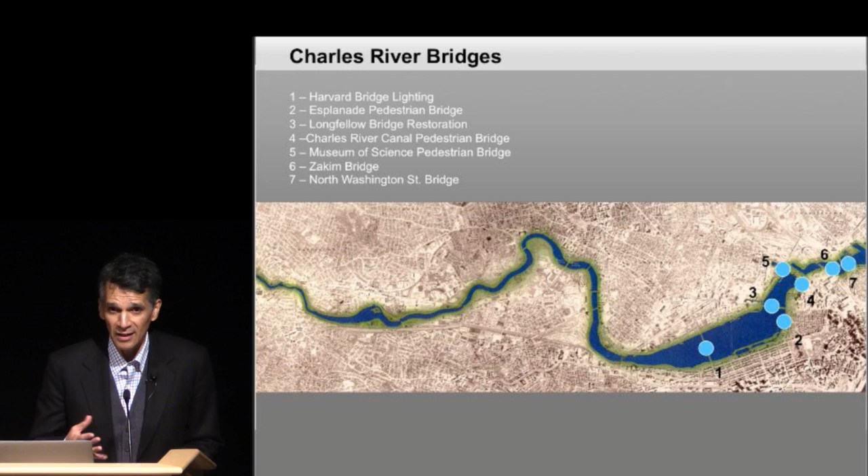But luckily, we were able to win a competition to do a lighting for the structure, and this is all private funding. It's a donor that's going to stay anonymous, and they're going to provide, I would say, about $3 million to do a new lighting for the project.

The Harvard Bridge is very low-key, but one of the things that is important about the bridge is the granite piers. These are historic—this is the oldest bridge actually in the Charles River, one of the oldest. We decided to highlight the structure from underneath. That was one of the things that we wanted to do. We added these little blue lights, which will be part of the structure supporting the bridge itself. We always feel like it's important to highlight different structural elements of a bridge when you light it, and this is one of the ways that we thought we could do it.

This is another view from the side. But the most interesting part of the bridge are actually the smoots. I don't know if you've read about it, but it's a dimensional system that was created by MIT students. It refers to Mr. Smoot, who is 5 feet 7 inches.

Every year, students come and mark these crossings: 10 smoots, 20 smoots, 30 smoots. So I took that design and made all the lights align with that. At night, when you walk from the Back Bay to MIT, you'll see the smoots illuminated, and they will also turn on and off in order.

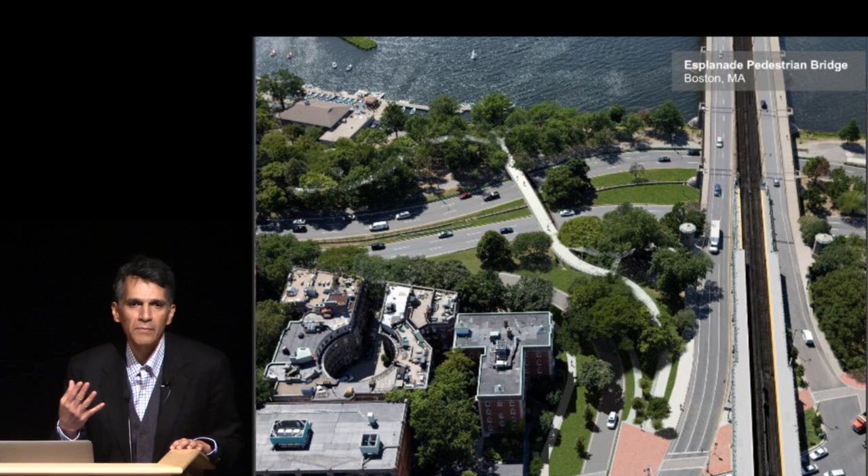This one is going to be 14 feet, so it'll be double the size, with much more capacity. This is a view from above. Of course, this was added as part of the Longfellow Bridge project, and the Longfellow Bridge is a much bigger project—right now I think it's $300 million for the renovation.

But I think this bridge is going to have as much impact as the Longfellow in terms of mobility and making connections between the different areas. This is from the side. One nice thing about the existing bridge is that when you come at the end, go to the water, and turn the ramp, there is a nice overlook area where many people take photos.

So I decided to keep that part of the bridge. At the very end, we're going to have a very nice curved overlook, and when you come to that point, you'll have a beautiful view of the river and of the other bridge, but it will be much bigger so people won't get crowded anymore. We're also going to have stairs coming down, so you can take the stairs if you don't want the long ramps. It's always important that a bridge have functionality and efficiency, but also some beauty and context integration—I think this bridge achieves that.

The railing is very thin, so we want to make it very transparent. This is from below, and the shape is interesting, like an orange peel. It goes small, then wide at the top, then small again.

That's because I didn't want to impact the esplanade very much, so it comes to a very small point on the park side. The esplanade is a landmark park, protected by the Landmarks Commission, and any intervention has to be approved. It's kind of hard to get the approval. This is a view from the side.

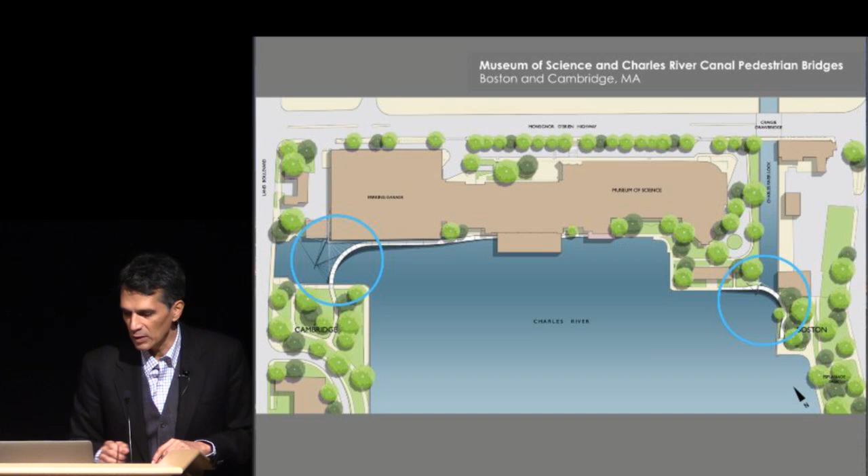The first one looks like this, and we only found a little space between these two buildings to support this tower. The cables are in the back, and the view is towards the other side. I was trying to see how you could make the parking garage look better, and then you're going to have this fan of cables kind of pushing it a little bit back.

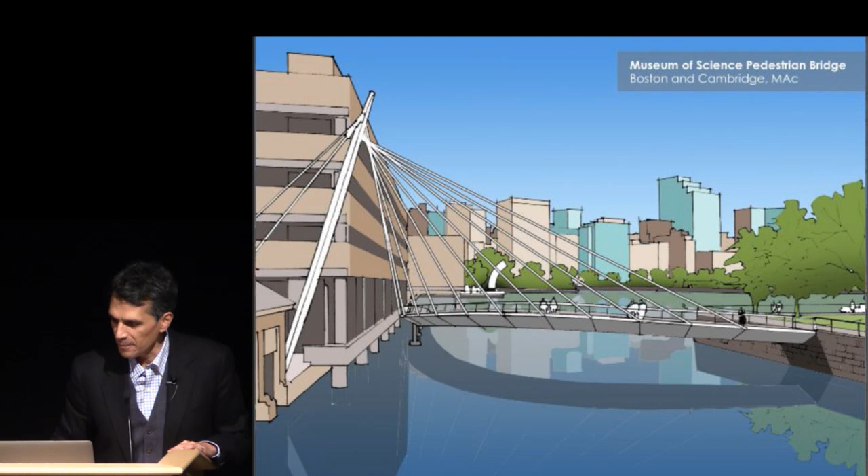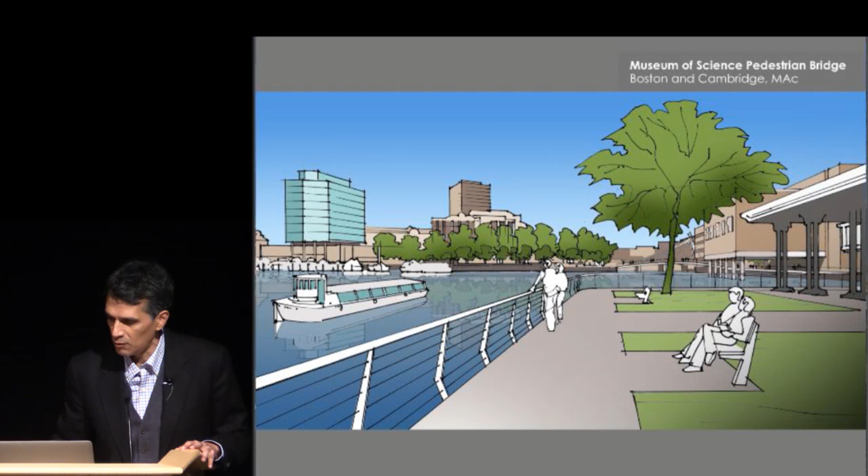Once you are in this area, the area actually is very nice, but you cannot get there right now. The museum has completely turned its back to the river, but with these bridges you will be able to enjoy that view, and it's a very beautiful view because you can see the Longfellow and you can see the whole downtown. This is when you're coming from the side, and you can see here how it has to kind of bend around it, and this is once you are on the other location.

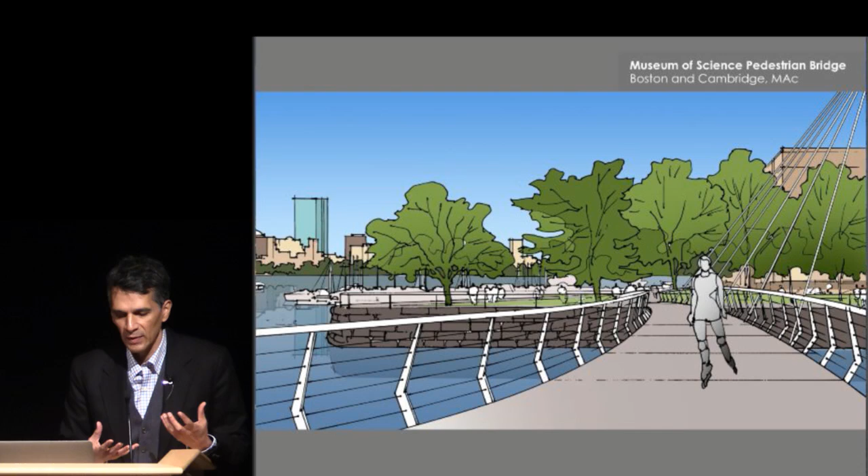And of course we think that it should be lit. This is a steel structure, and because it's curved, you're able to only support it from one side. If the bridge was straight and you put only cables on one side, it would fall down, but when it's curved, you create like a ring, and it's more stable in itself. That's why that's possible to be done.

This is the other one, which is also curved, but that's going in the other direction. This one has to open, and it opens like that. In this case, it's a bascule structure, but because I want it to be very light, it's open with a hydraulic cylinder, which is unusual. It will be the first bridge in the US that you'll be able to do that, and mainly that's because the loads are not very big and it's a small structure.

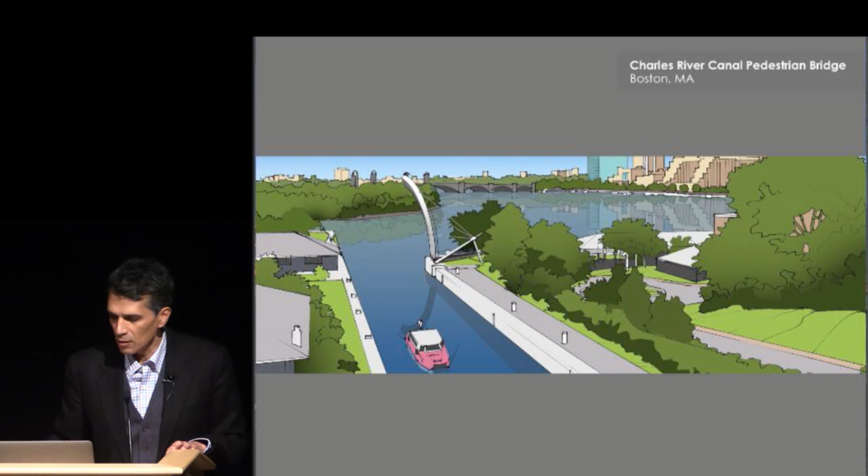And that means that you don't have a counterweight, so it's very light, and this cylinder will just push down and will raise it up. So if you see it from the other side, it's like that, and that's open. So when it's open, it's actually very nice because it has a curve and it looks like a wing.

And of course we come to the sixth bridge, and the sixth bridge is how I started to be involved in bridge design, and it's something that changed my life completely. It was very controversial, and it was very difficult to keep a design that would work, and there were so many people involved in it. But I think the result is very successful, and it created a new image for that area and also made Boston look more avant-garde. Before that, there was never a cable structure in New England or anywhere in Boston, and that really transformed the area, and it has influenced me from the very beginning.

One of the things that we cared a lot about was the lighting of the structure, and some years back the lights were turned off, and I was very upset, so I really pushed to turn them back.

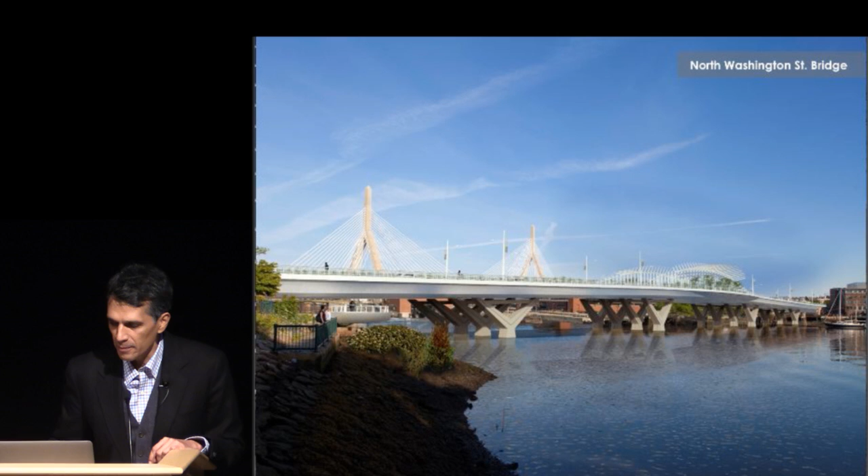We didn't want to do a cable structure, because I think that would be more like a copy. So this is a structure supported from below. You can see it from the side — it's very light, again, very transparent.

You can see here how nice it's going to be to walk on it. Right now, it's very uncomfortable to walk on it.

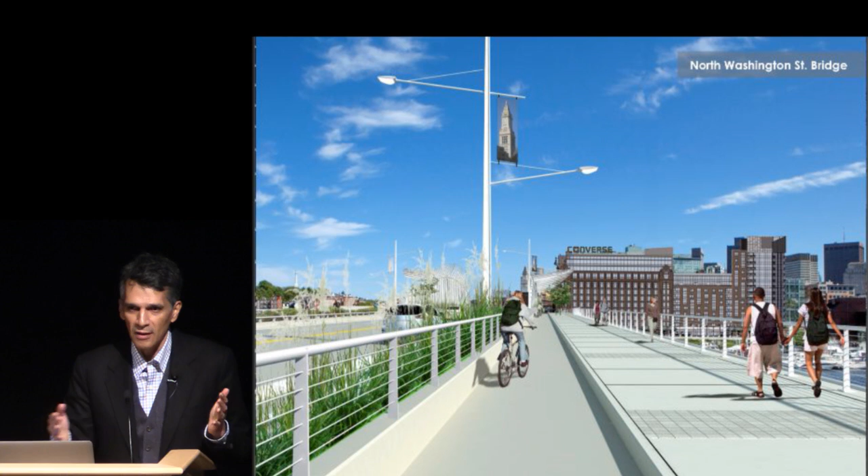So we'll have a 7-foot bike lane, which will allow bikers to pass each other, and a 12-foot sidewalk. That's basically almost 20 feet, which they never had in the past, and that will be on both sides. So altogether, it's about 40 feet dedicated only to pedestrians and bikers.

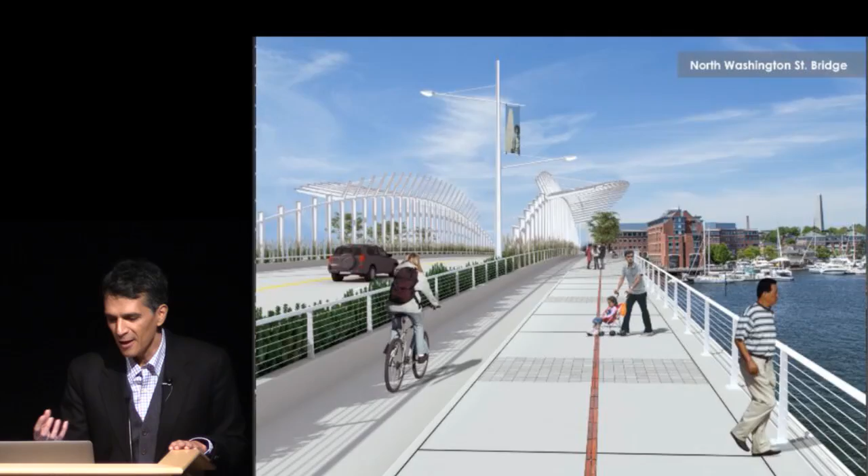These are some other views. This structure here is basically a trellis with landscaping, and it creates a space similar to what was done at the North End parks, where you have a place where you can see. The view is absolutely beautiful.

At those locations, we are going to have some panels with history about what you can see. Because when you walk the Charlestown Bridge, for example, right now on the North Washington Street Bridge, you see the Zakim Bridge, but you don't know anything about it unless you read it in a book.

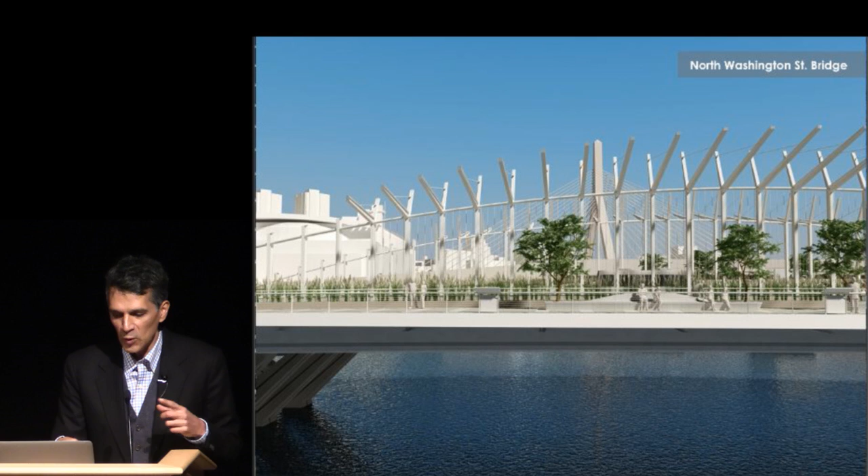So actually, on the bridge, we're going to have different explanations about the things you can see, like the Bunker Hill Monument and the Custom House Tower, because the view is ideal. You can see here how the two relate to each other.

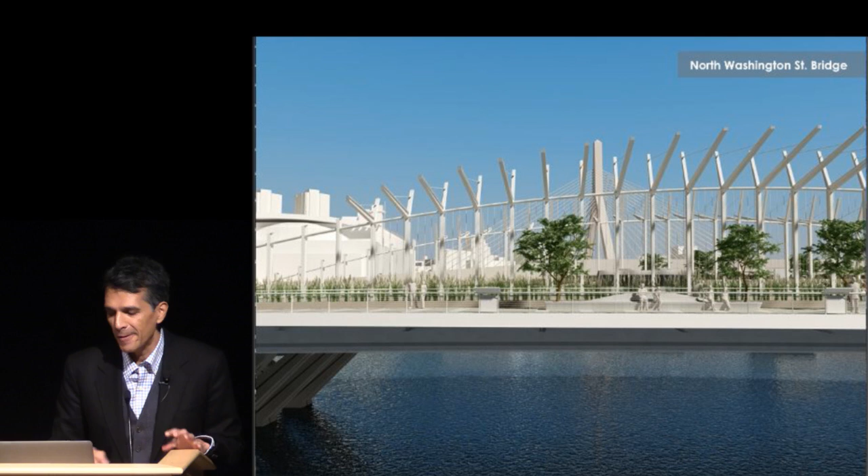All the vocabulary and geometry is very triangular and sharp, and some people think it looks like a fish. Actually people fish there, and you can see the bones of the fish when you are walking. So that's one of the inspirations, I suppose.

You can see them together here — I think they keep each other good company. One is a very strong vehicular bridge, mainly the interstate, and the other one is a lighter bridge that is more oriented to pedestrians and bikers.

This one is in the preliminary design, and it should open, we hope, around 2021. So that's the goal. Thank you very much.

Well, as I've said before in this class, we have different kinds of guests. We have some who are very much about talking entirely about the process—people like advertising people and stuff like that. But I love having guests like you who produce specific designs that are rich, and there's a lot to talk about.

And I will want to get into bridge design and accompanying infrastructure design, because it seems like it's a seamless world between the bridge and everything associated with it. But it's a very particular kind of thing at the intersection of urban design and engineering, it seems to me. We have a lot of engineers in the audience, and I'm sure all of them have been exposed to bridges, if only as structures problems, in their education.